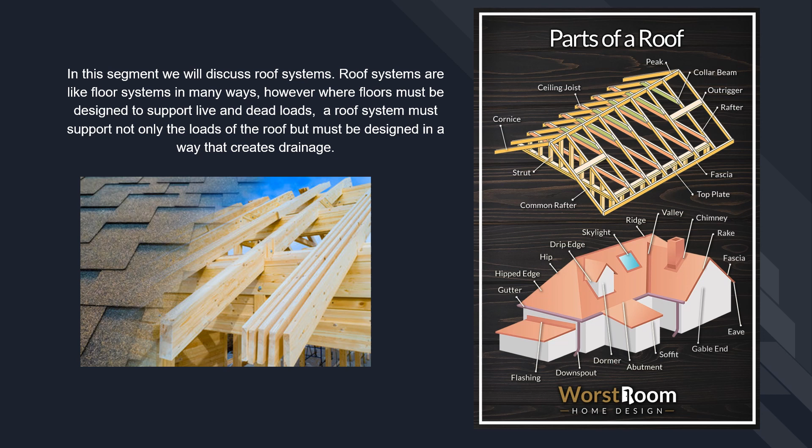However, where floor systems must be designed to support live and dead loads, a roof system must support not only the loads of the roof, but must be designed in a way that creates drainage. I would suggest reviewing our floor system segment, as roof framing can be similar. Roofs can come in many different forms and configurations and can be made of many different materials.

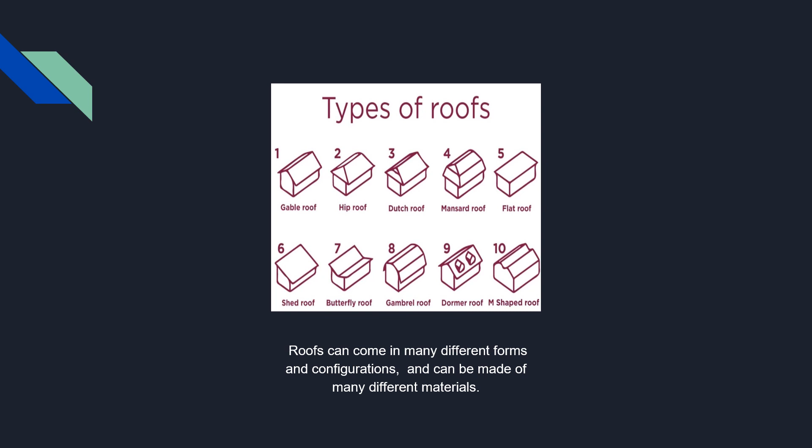Roof systems on residential structures are many times drastically different from those on commercial structures. Commercial roof systems can consist of steel, metal, concrete framing, as well as structural concrete planking, steel bar joist systems, and a multitude of other systems.

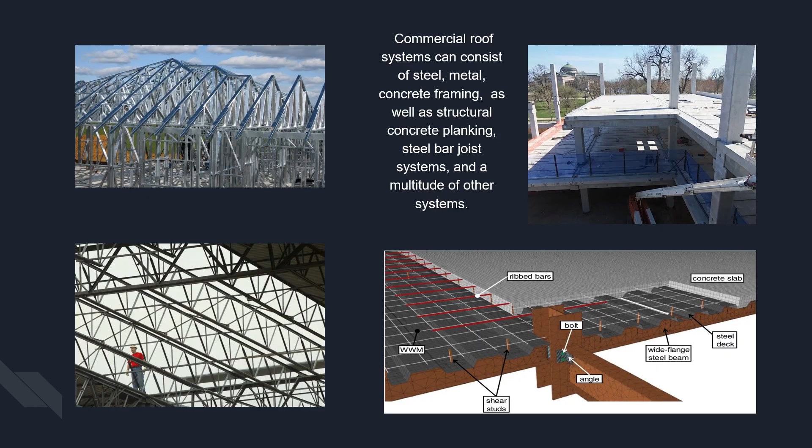In this segment, we will discuss wood-framed residential, light commercial, and multifamily roof systems only. Depending on the type of roof system a project calls for, roof framing may be almost identical to floor framing, such as a flat or low slope roof.

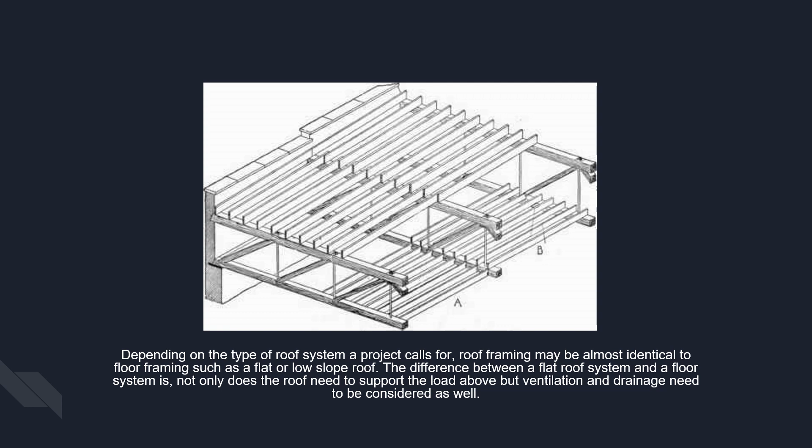The difference between a flat roof system and a floor system is not only does the roof need to support the load above, but ventilation and drainage need to be considered as well. Most roofs require some pitch for drainage. Pitch is the number of inches a roof slopes down per every 12 inches of run. Any roof system with pitch of less than 3 in 12 is considered a low slope roof.

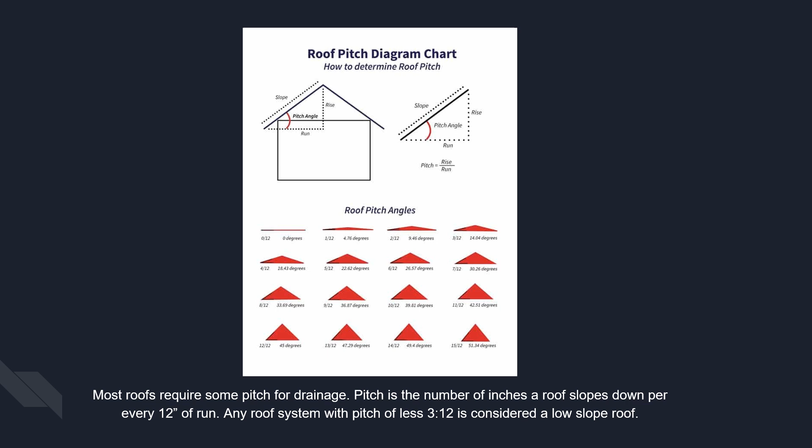Most flat roof systems are not totally flat. Provisions are always made for drainage of water, snow, and ice. On a flat roof, pitch can be achieved in several different ways. Walls may be framed higher on one end to provide a slope for the roof.

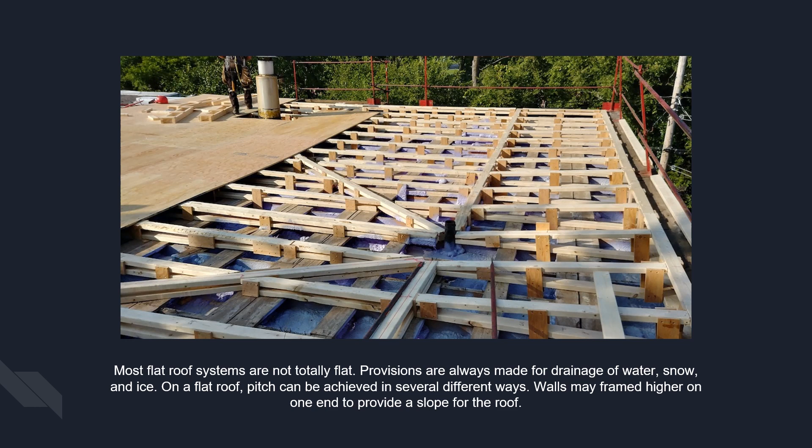The roof may also be framed flat and then built up with tapered sleepers to provide pitch and drainage. Sleepers are typically 2x lumber, cross-ripped at an angle, and nailed on top of the roof joist to provide slope.

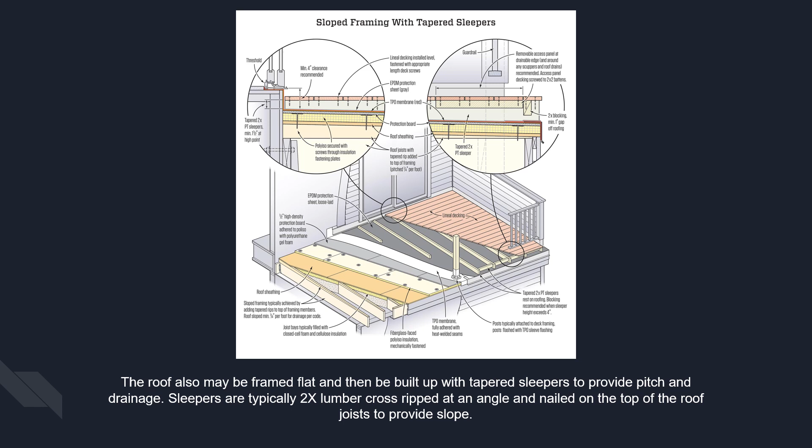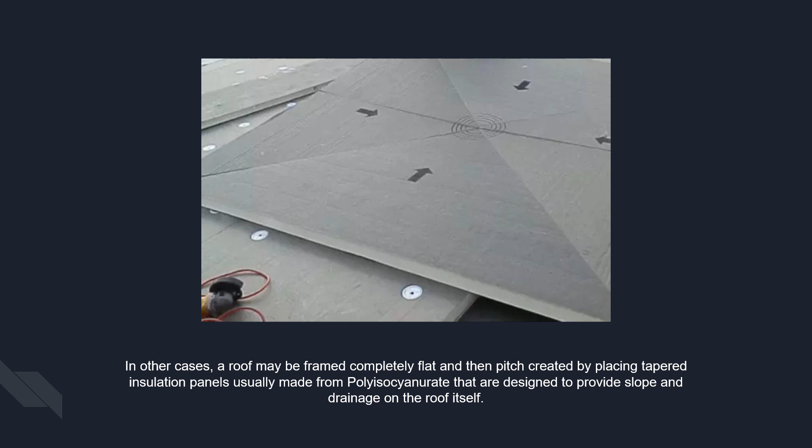In other cases, a roof may be framed completely flat and then pitch created by placing tapered insulation panels, usually made from polyisocyanurate, that are designed to provide slope and drainage on the roof itself.

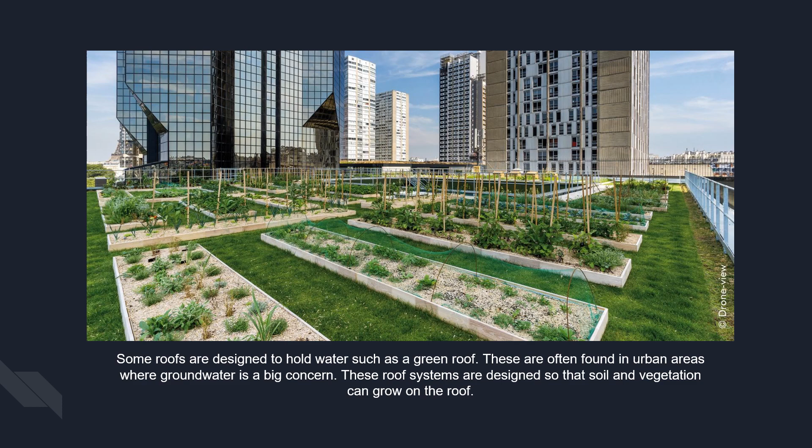Some roofs are designed to hold water, such as a green roof. These are often found in urban areas where groundwater is a big concern. These roof systems are designed so that soil and vegetation can grow on the roof. The excess water drains through provisions built into the roof itself.

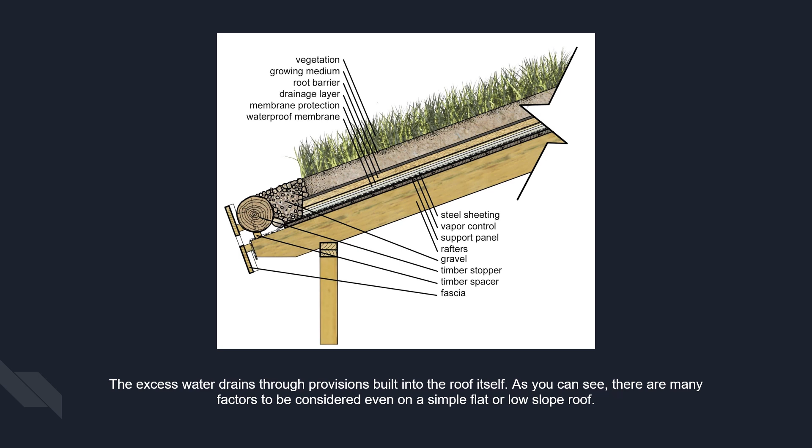As you can see, there are many factors to be considered even on a simple flat or low sloped roof. As we move on from flat or low slope roof systems to traditional pitched roof systems, the nomenclature for the components changes. We will discuss these components and how they are used.

In these roof systems, the lower part of the roof is referred to as the eave, and the highest part, or peak, is the ridge.

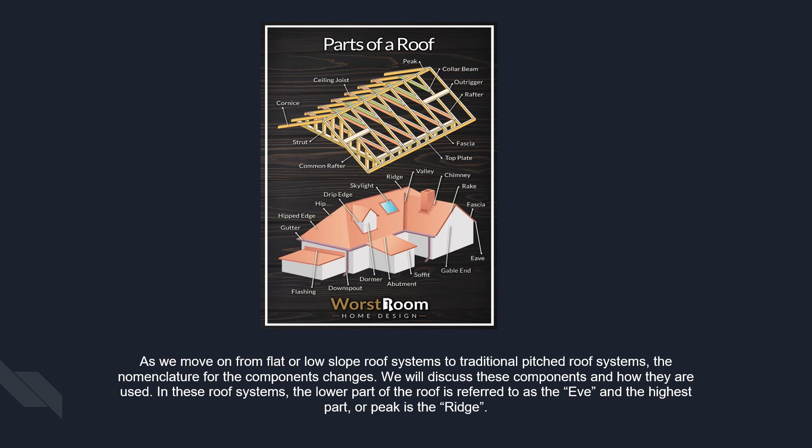Pitched roofs can be designed in many different configurations. The most common configuration is a simple gable or A-frame in the shape of a triangle. The reason many roofs are in the shape of a triangle is because a triangle provides maximum strength and drainage.

On a very basic gable roof, the bottom chord of the triangle, the ceiling joist, is typically level and spans from one side of the structure to the other, tying the exterior walls together. The two vertical sides, rafters, are at any angle needed to provide the desired look and pitch.

When these three sides are joined together properly, the triangle becomes a very strong structure, and the downward force, snow, rain, and ice, from above would have to separate the sides from the bottom for the roof to fail. A properly designed roof will resist these forces.

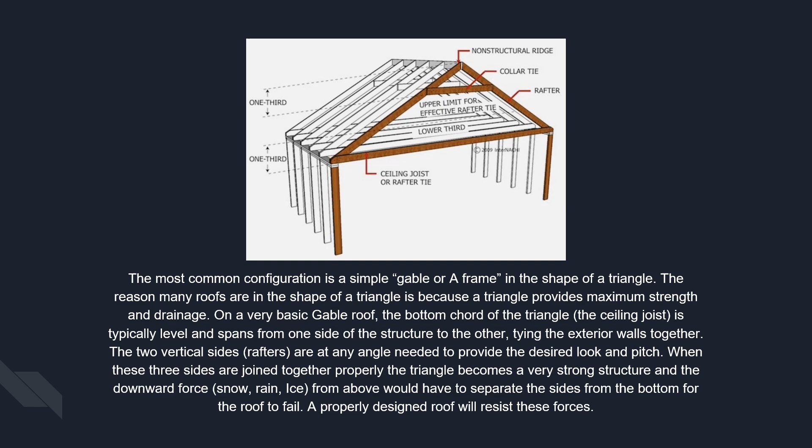Most residential pitched roofs are variations of this. A roof pitched on more than two sides that comes together at an outside corner is a hip roof. The corner rafters are called hip rafters, and the shorter rafters that meet the hip rafter are called jack rafters.

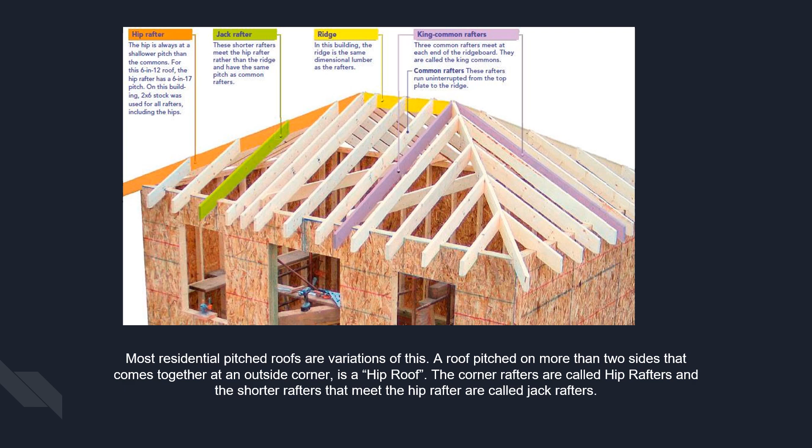There are several ways for these types of roof designs to be framed. The most common method is that the ceiling joists are first attached to the top plates of the walls below. Ceiling joists can either span the entire distance of the structure or be split at load-bearing walls or beams if needed.

Once the ceiling joists are installed, the rafters are cut to fit and placed beside the ceiling joist on the wall's top plates. The rafter tails are typically notched to sit on top of the wall and hang down below it.

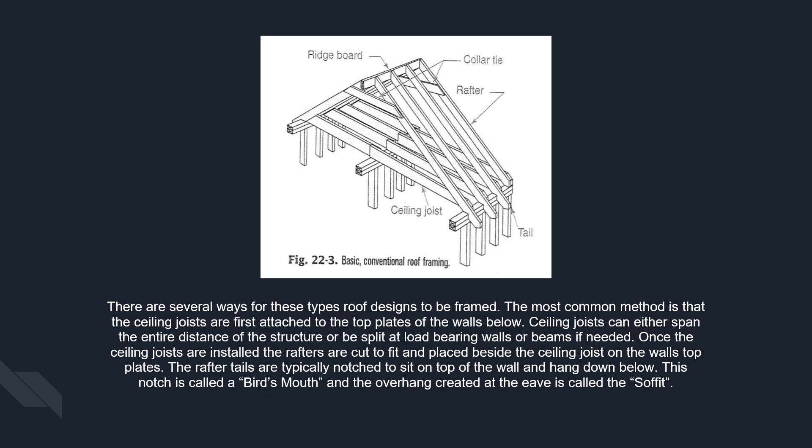This notch is called a bird's mouth, and the overhang created at the eave is called the soffit.

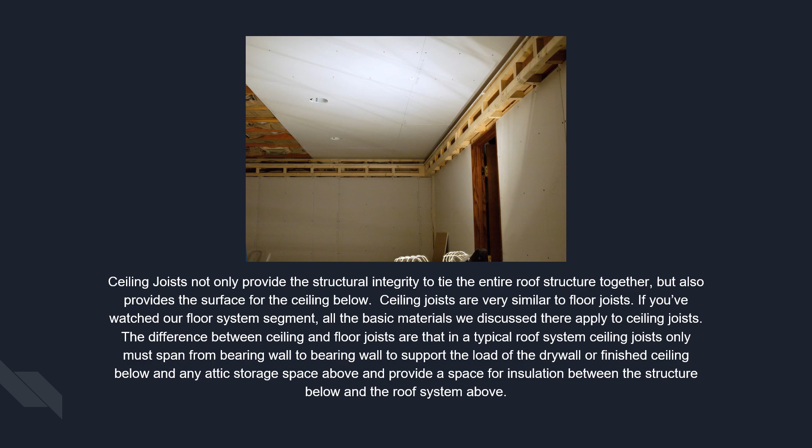Ceiling joists not only provide the structural integrity to tie the entire roof structure together, but also provide the surface for the ceiling below. Ceiling joists are very similar to floor joists. If you've watched our floor system segment, all the basic materials we discussed there apply to ceiling joists. The difference is that in a typical roof system, ceiling joists only must span from bearing wall to bearing wall to support the load of the drywall or finished ceiling below and any attic storage space above, and provide space for insulation between the structure below and the roof system above.

The rafters extend until they meet at the ridge. Typically, on a traditional framed roof system using ceiling joists, there is a ridge board that runs the entire length of the roof and is not structural, as it only provides an attachment point where the rafters come together. Each rafter on each side of the roof is nailed to this ridge board, as well as to the walls below through the bird's mouth, and attached to the ceiling joist.

When spanning longer lengths with rafters, a collar tie is usually added one third of the distance from the ridge to provide additional strength. There is usually a finish board nailed to the ends of the rafters called the fascia. The fascia is typically a flat board that ties all the rafter tails together and provides a surface for the gutter to attach to.

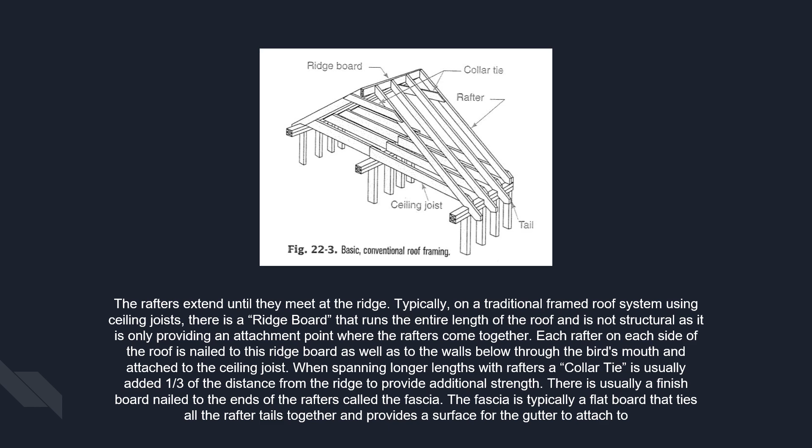Sometimes structures are designed so that there is no flat ceiling below and the rafters become the ceiling surface. This is referred to as a cathedral ceiling. When this is the case, there are no ceiling joists to provide that rigidity to tie the system together. There are a few methods that can be used to provide the structural soundness to frame this.

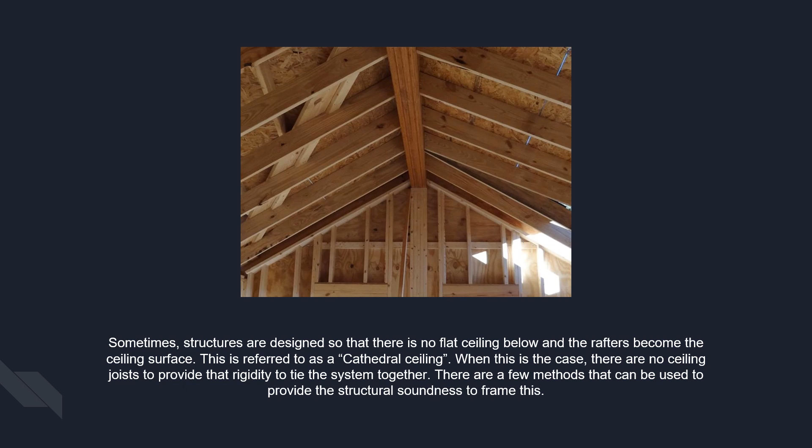In a true cathedral ceiling system, the ridge board becomes a beam with structural posts on either end. The ridge beam is designed to support the load of the roof. The rafters are then nailed or attached to the ridge beam, as well as to the top plates of the walls below, providing the same type of structural integrity as if ceiling joists were there. In this system, the ridge becomes the structural part of the roof that resists any forces from above.

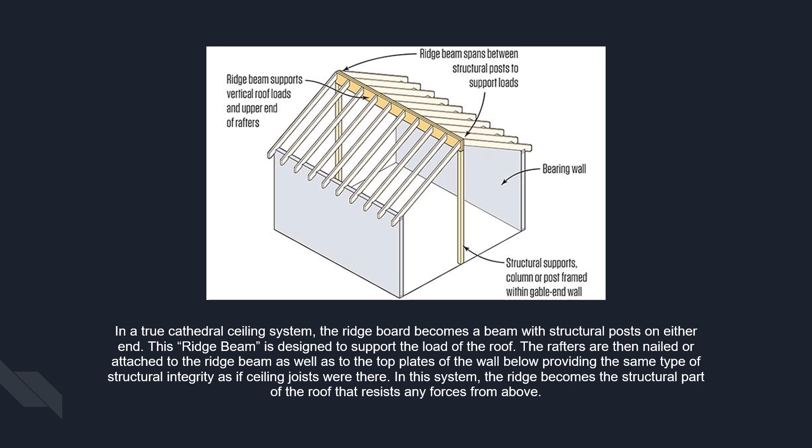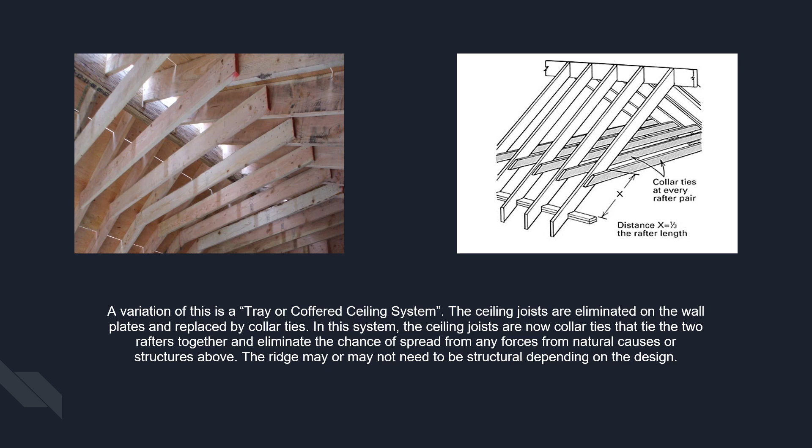A variation of this is a tray or coffered ceiling system. The ceiling joists are eliminated on the wall plates and replaced by collar ties. In this system, the ceiling joists are now collar ties that tie the two rafters together and eliminate the chance of spread from any forces from natural causes or structures above. The ridge may or may not need to be structural depending on the design.

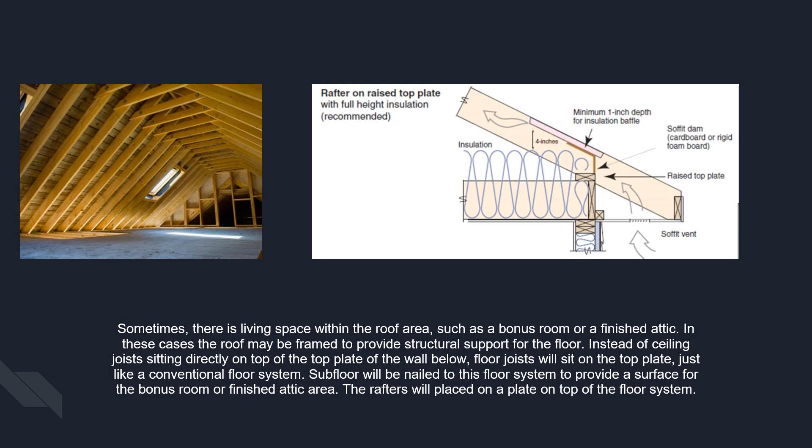Sometimes there is living space within the roof area, such as a bonus room or a finished attic. In these cases, the roof may be framed to provide structural support for the floor. Instead of ceiling joists sitting directly on top of the top plate of the walls below, floor joists will sit on the top plate, just like a conventional floor system. Subfloor will be nailed to this floor system to provide a surface for the bonus room or finished attic area. The rafters will be placed on a plate on top of the floor system.

Hip roofs are designed to pitch in two directions, coming together at an outside corner. There is typically a rafter that runs from the corner of the building up to the ridge, which is called the hip rafter. The hip rafter is basically an angled ridge. There is not a lot of load on the hip rafter from above, as both roof systems pitched towards each other are squeezing the hip rafter and not producing a downward force. The rafters that tie into the hip rafter on either side that support it are called the jack rafters.

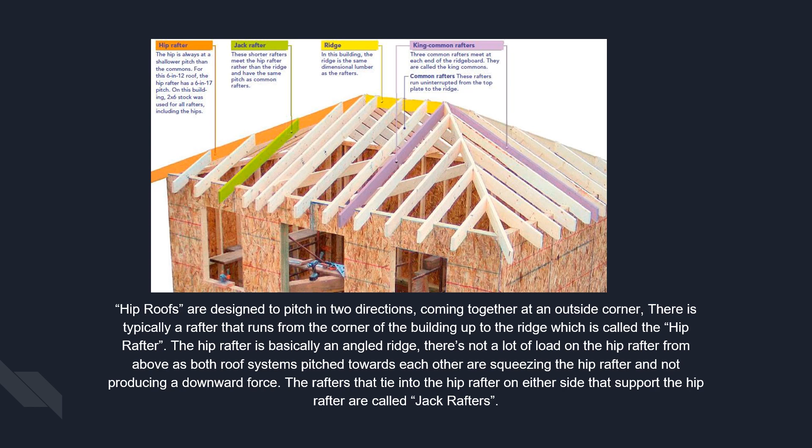Valleys are created when two roofs come together on an inside corner. Valleys can be framed in several different ways. If you have a dormer that is purely aesthetic and has no usable space below that sits on top of a roof, that dormer can be overframed on top of the main roof framing. In this case, there are no additional loads placed on the structure of the roof other than the valley rafters that are supporting the dormer and whatever load might end up on top of that dormer.

In a circumstance such as this, the main roof is typically framed first, and any roofs that are overframed on top of it are framed above and sit on top of a wide plate attached to the main roof called a valley plate. The valley plate is just there to provide support for the valley rafters of the overframed portions of the roof.

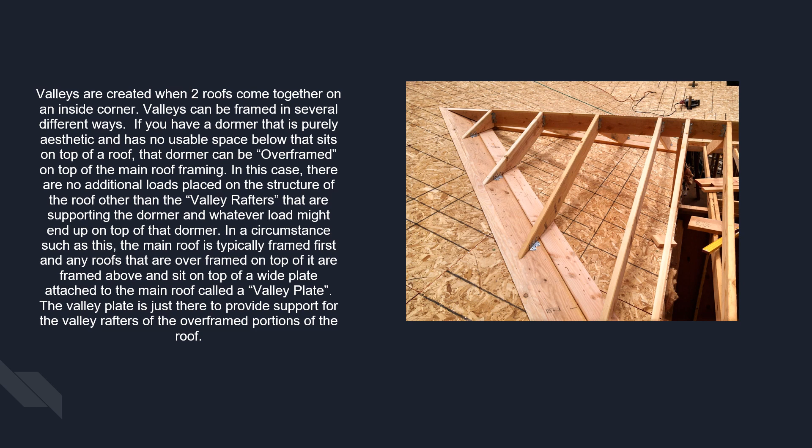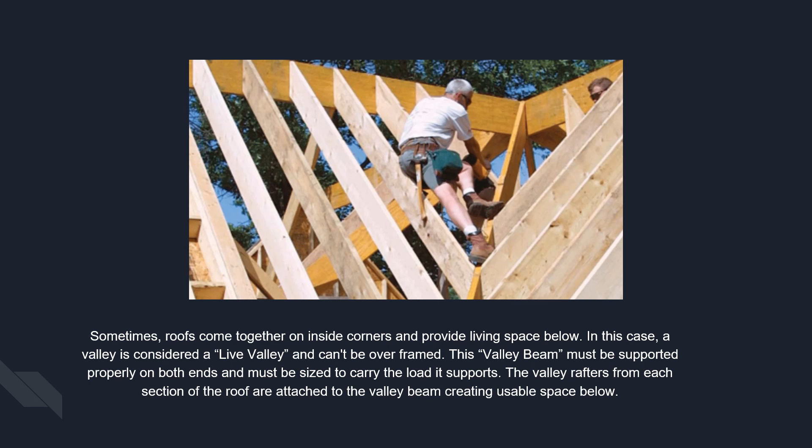Sometimes roofs come together on inside corners and provide living space below. In this case, a valley is considered a live valley and can't be overframed. This valley beam must be supported properly on both ends and must be sized to carry the load that it supports. The valley rafters from each section of the roof are attached to the valley beam, creating a usable space below.

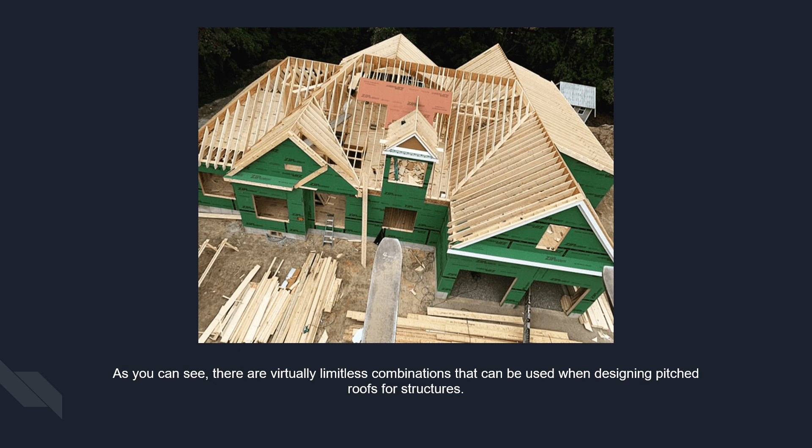As you can see, there are virtually limitless combinations that can be used when designing pitched roofs for structures. Ceiling joists, rafters, ridges, hips, and valleys can be dimensional lumber or engineered products depending on the loads that they must carry. Ridges, hips, and valleys are typically deeper than the rafters they support.

For example, if rafters are made from 2x10s, the ridges, hips, or valleys they fasten to are typically at least 2x12s, so that they provide a larger surface for the rafter, which is cut on a pitch, to nail to. If the ridge, hip, or valley is load-bearing, then the size of the member is determined by the load it must support.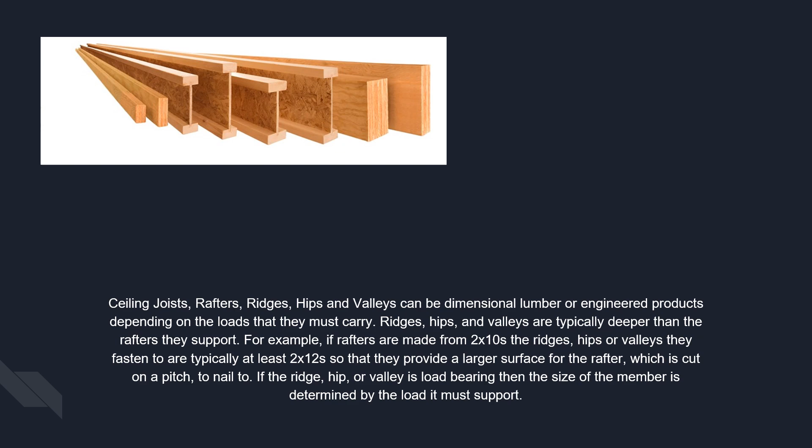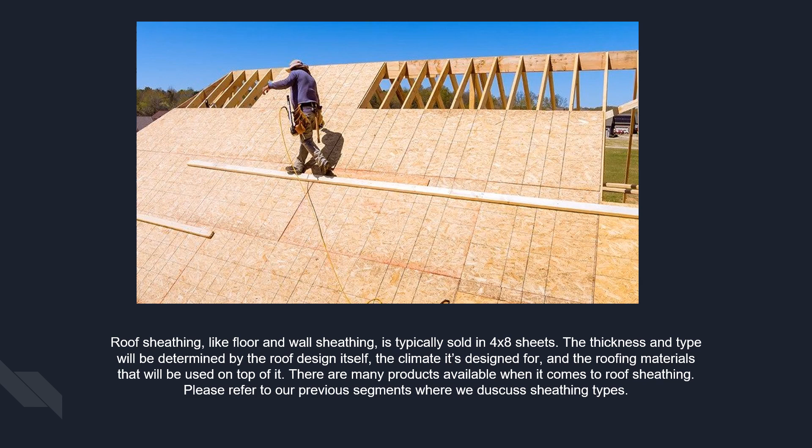Roof sheathing, like floor and wall sheathing, is typically sold in 4x8 sheets. The thickness and type will be determined by the roof design itself, the climate it's designed for, and the roofing materials that will be used on top of it. There are many products available when it comes to roof sheathing. Please refer to our previous segments where we discuss sheathing types.

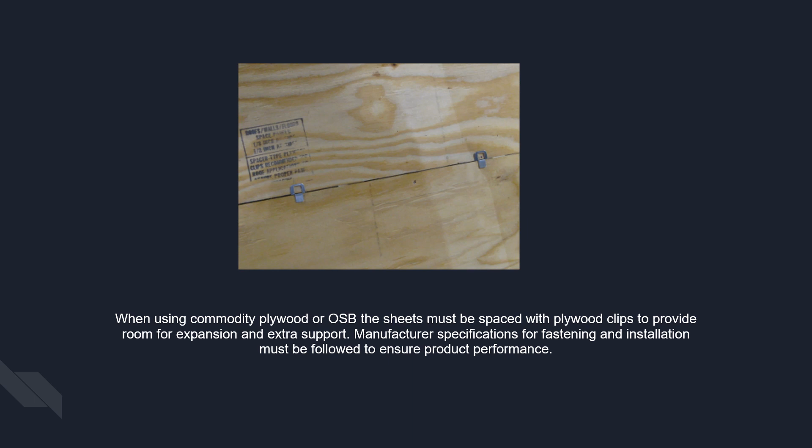When using commodity plywood or OSB, the sheets must be spaced with plywood clips to provide room for expansion and extra support. Manufacturer specifications for fastening and installation must be followed to ensure product performance.

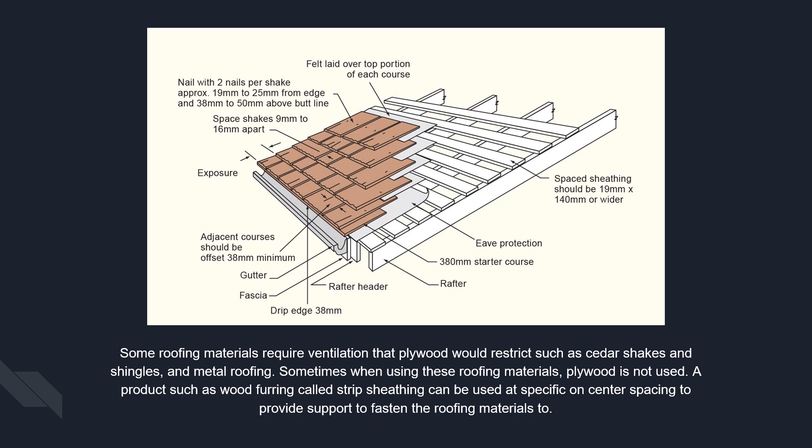Some roofing materials require ventilation that plywood would restrict, such as cedar shakes and shingles and metal roofing. Sometimes, when using these roofing materials, plywood is not used. A product, such as wood furring, called strip sheathing, can be used at specific on-center spacing to provide support to fasten the roofing materials to.

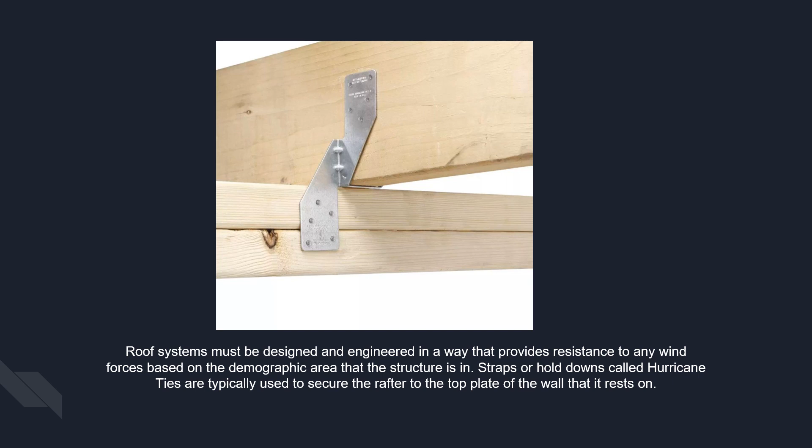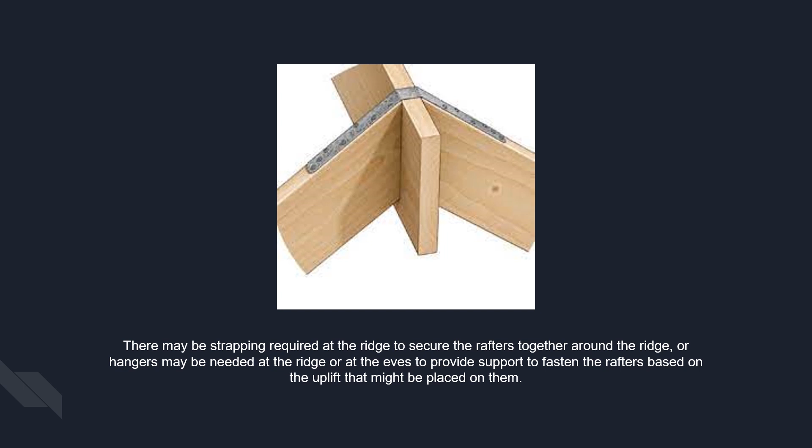Roof systems must be designed and engineered in a way that provides resistance to any wind forces based on the demographic area that the structure is in. Straps or hold-downs, called hurricane ties, are typically used to secure the rafter to the top plate of the wall that it rests on. There may be strapping required at the ridge to secure the rafters together around the ridge, or hangers may be needed at the ridge or at the eaves to provide support to fasten the rafters based on the uplift that might be placed on them.

Like floor systems, roof systems can also be pre-manufactured off-site using trusses. It's very important to know the differences between a stick frame roof and a truss roof, as well as the materials needed for each. While a truss roof system replaces many of the items used to individually make up a stick-framed roof, such as rafters, ceiling joists, collar ties, and ridges, additional bracing must be used, and the additional labor and materials needed to make each truss must be considered when comparing to a stick-framed system.

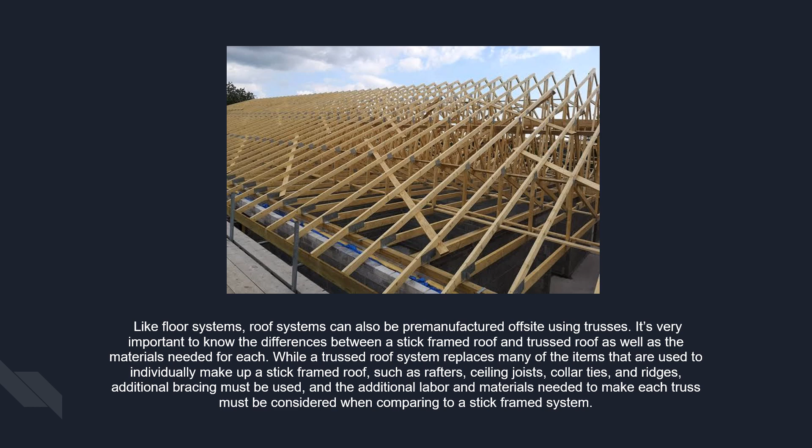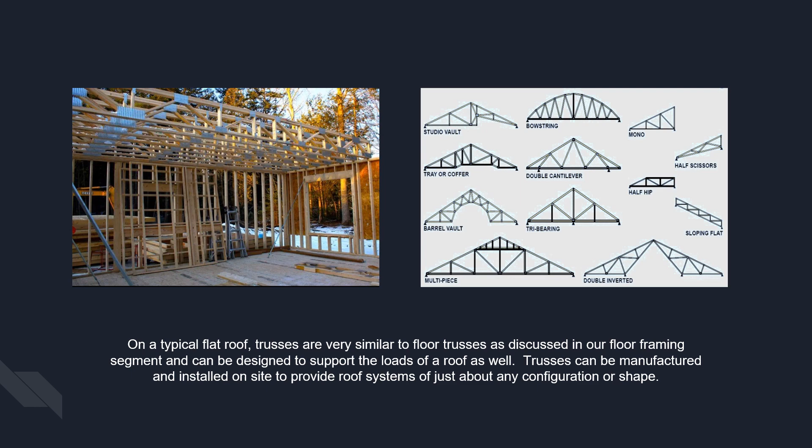On a typical flat roof, trusses are very similar to floor trusses as discussed in our floor framing segment, and can be designed to support the loads of a roof as well. Trusses can be manufactured and installed on-site to provide roof systems of just about any configuration or shape. Trusses may replace rafters, ceiling joists, collar ties, as well as beams and headers needed to support these items.

In a typical roof truss system, there are 3 sections that make up each truss. There's a bottom chord, typically making up the part of the roof that would be the ceiling joist. There are top chords, typically making up the part of the truss that would be the rafters. And there are structural members called webs, which provide the support between the top and bottom chord.

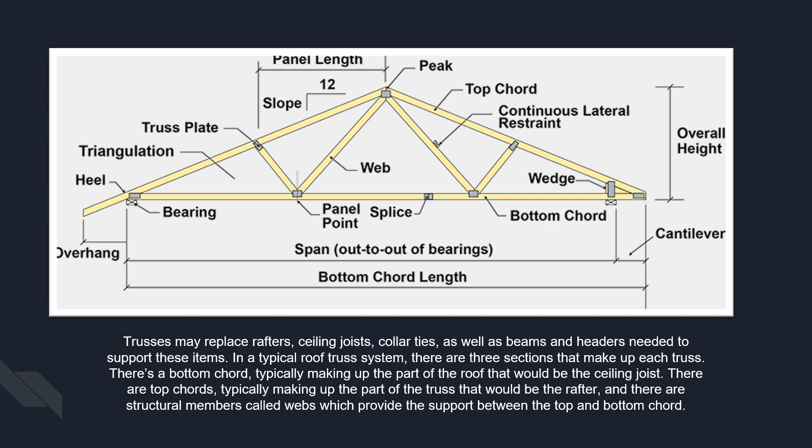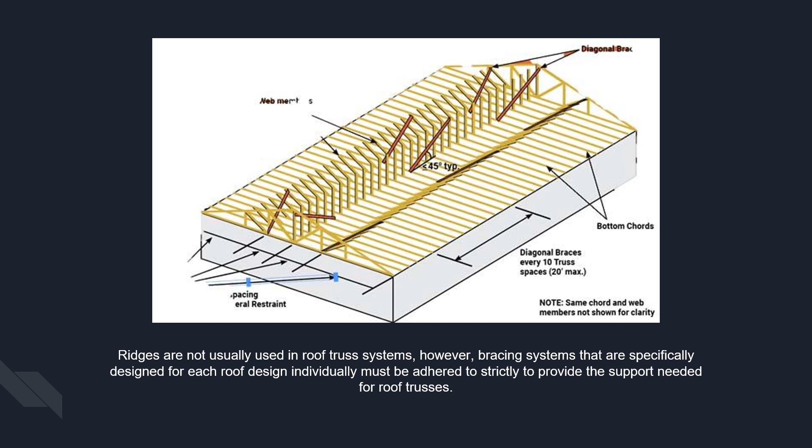Ridges are not usually used in roof truss systems. However, bracing systems that are specifically designed for each roof design individually must be adhered to strictly to provide the support needed for roof trusses.

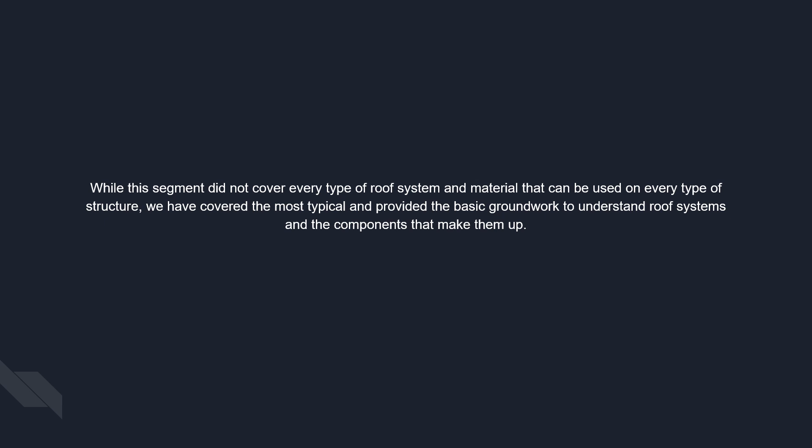While this segment did not cover every type of roof system and material that can be used on every type of structure, we have covered the most typical and provided the basic groundwork to understand roof systems and the components that make them up.